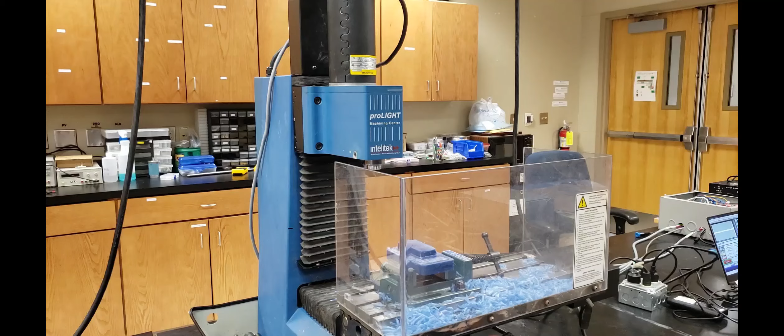This is a live demo of how to set your tool offsets and define the workpiece offsets. We will first demonstrate how to find the tool offsets for this machine.

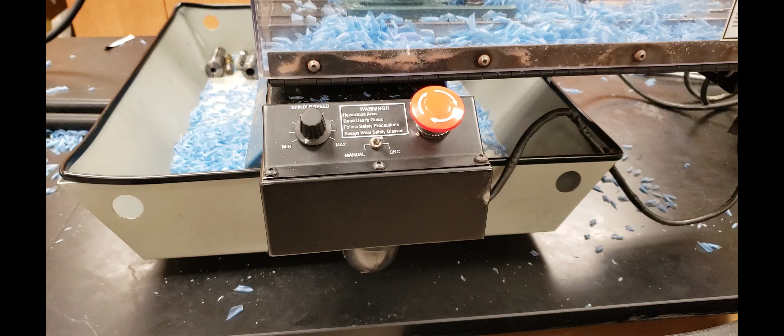Before we do anything in the machine, if we're going to be accessing this area in here, we must be sure that we hit the E-stop first.

Once the E-stop has been engaged, you can go ahead and lower the protective screen. Then using a pin, insert it into the slot here, and rotate the spindle until the pin locks in and prevents the turret from rotating.

Once you have that, you may then grab your reference tool, which will probably be the 9/16, and your Allen wrench, which is about 3/8, and insert it into the collet below.

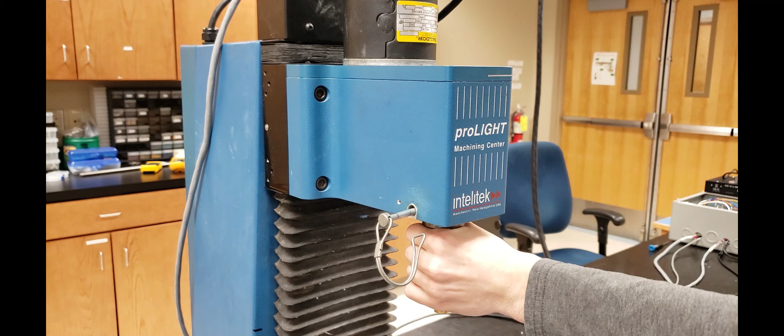If you're working by yourself, be sure you have one hand on the tool and slide it into the collet, but keep holding it with your hand, and with your free hand, go ahead and tighten the draw bolt on top, like so.

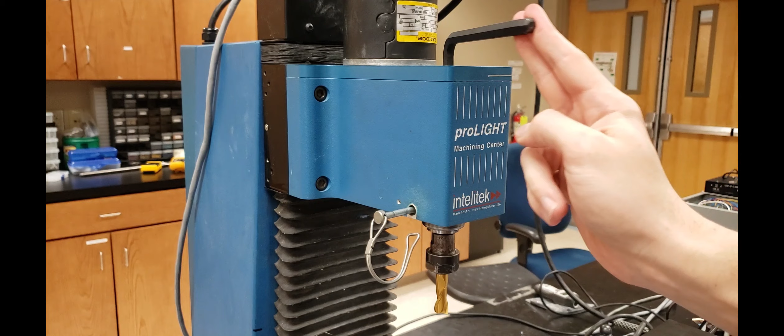For tightening, all you have to do is place the Allen wrench like so, and with two fingers on the end, just go ahead and push until it is tightened. That's all you need to do to tighten the tool in.

Once the tool is in, you may now remove the safety pin, bring up the blast shield, and disengage the E-stop.

Once we have the tool in the spindle, when you hit the E-stop and disengage it, you'll have to click on reset, since this is a digital emergency E-stop. Keep in mind you need to disengage that as well.

So once we have the tool in, we first want to go to our configure tool table and make sure this table is populated with all the tools that we'll be using.

For our reference tool, that will be our tool 1, which, like I said, will be the 9/16. We just want to make sure we enter the diameter, which is about 0.565 inches, or roughly that. The diameter of the tool may be different, so be sure you use a micrometer or another measuring tool to confirm what the diameter will be.

We'll also be finding the offsets for the 3/8 bit as well. Make sure you also enter the diameter. For this, for example, we'll just say the diameter for this tool is about 354 — again, this is just for example, not the actual diameter.

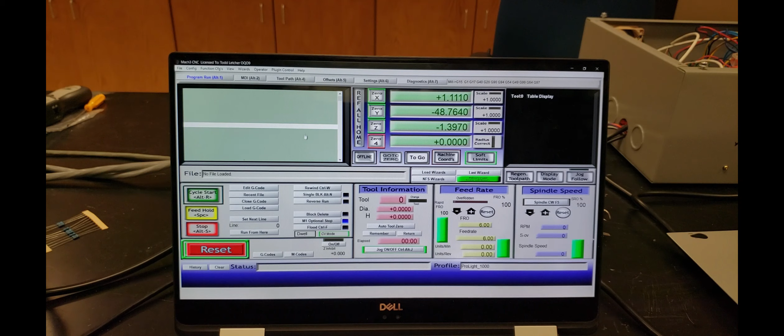When we find the tool offsets, we want the spindle motor to be off, so we don't need that running. Then we'll go ahead and go to our settings, our offsets.

In this window here, we want to click and make sure we enter tool 1. Then using our hot arrow keys, we're going to go ahead and move the tool above our place where we'll be finding the 0.

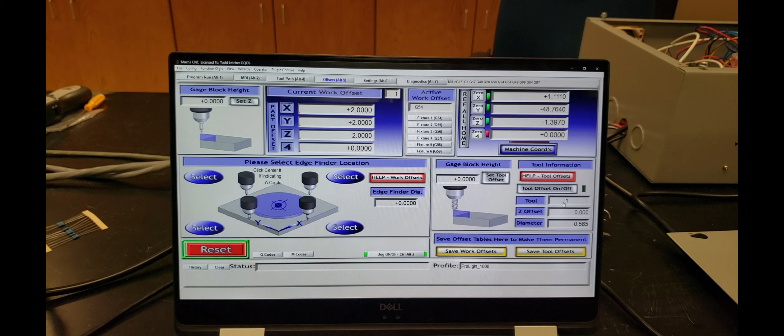In this case, we'll be using a wax block. We will now move the tool roughly above the block.

Before we go any further, you want to make sure that you're using a sheet of paper to help you determine when it touches off. So you'll just have this on top of the block.

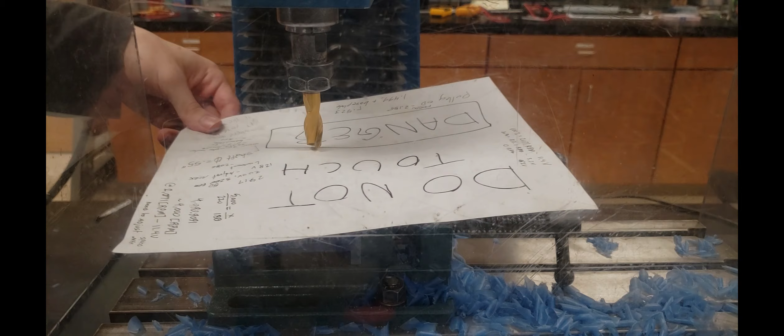If you have a partner, you'll ask him to move this back and forth, and once the tool makes contact with the paper and it stops shifting, that will be your 0 point. But if you're working by yourself, try to work best to your ability.

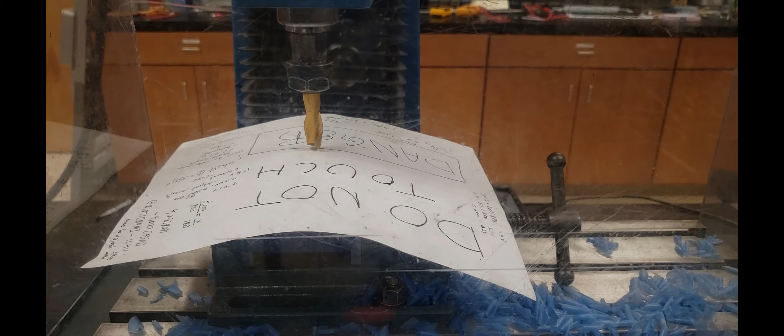In the software, there's just a few more things we need to take care of. Because we're using a sheet of paper to determine where our 0 point is, we need to tell the software how thick that sheet of paper is.

So first we want to go to gage block height, and then we want to enter the thickness of the paper. For this example, we'll say it's like 0.0032 inches. Then you'll hit enter, and it should propagate into this window. You want to enter the same value into this window as well.

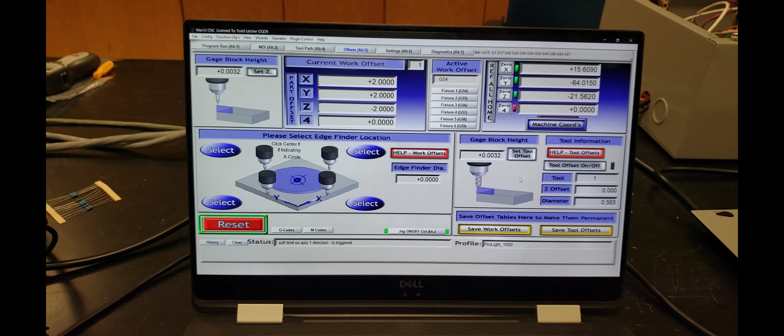The last thing to change is, because we want to touch the tool against the block, we want to make sure we don't go too deep. So hit the tab button and this window will pop up. Enter 10% for the jog rate and hit enter.

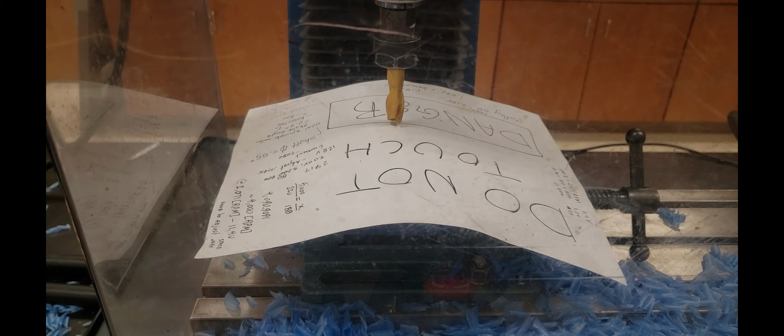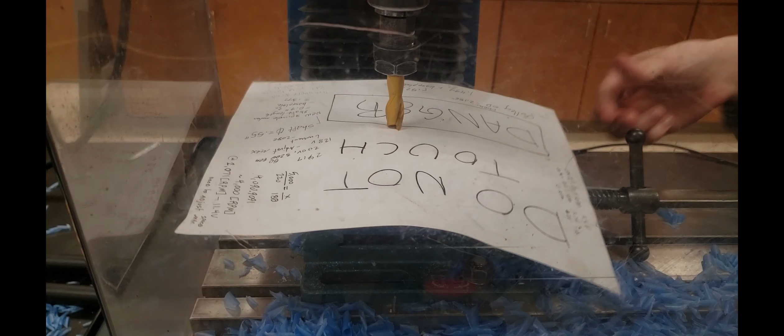Then click the tab button again, and that should slow down the rate of the axes. We will now touch off our reference tool to the top of the block. As you can see, the tool is touching, but the paper is still able to rotate, so we'll move it down a little further.

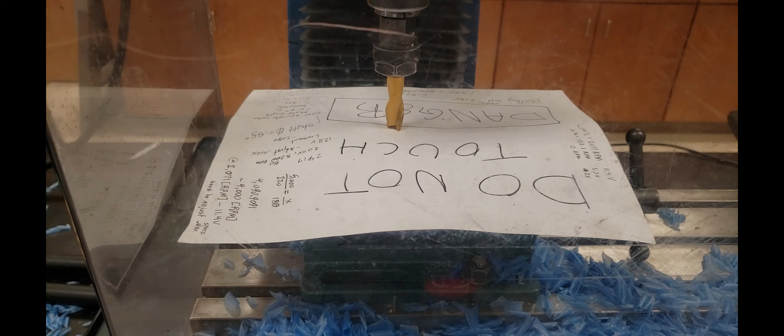Now the block is in contact with the tool, and the paper is no longer able to shift around. Now that we've touched down, we can go back to the software and implement the tool offset. Once the tool is touched, make sure to first click Set Z, and this will propagate the data over to here where our Z height is, then click Set Tool Offset. Notice this value here was positive, now it's become 0, and now the system knows this is our 0 point for our reference tool.

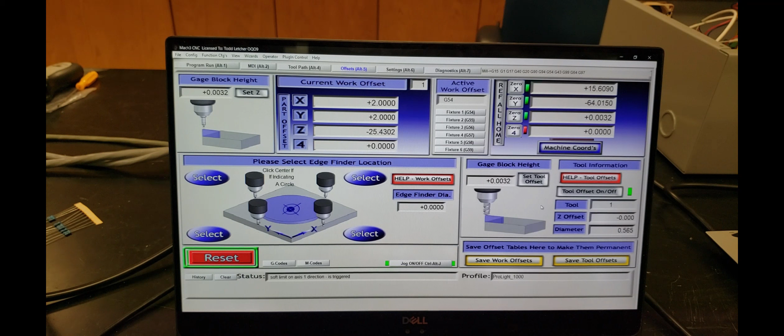Once we figure out our reference tool offset, we can go ahead and determine the other offsets for our remaining tools.

Once you have made your reference with your reference tool, go ahead and raise the spindle off the block just high enough so you have enough space to remove the tool and insert the next one. And once again, if you're going to be playing around in this area, make sure you hit the E-stop first before you open the blast shield.

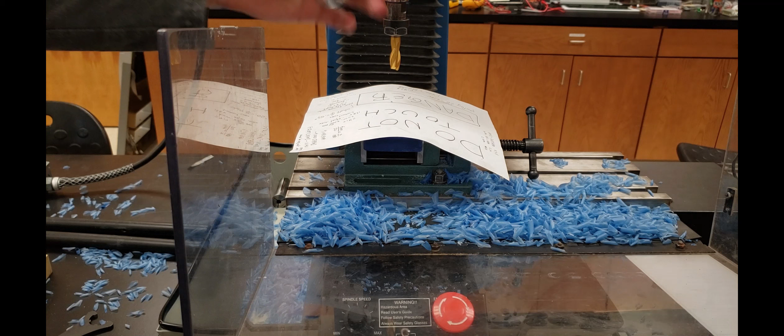And once again, in order to change the tool, make sure you insert the safety pin into the collet and make sure it's locked in place, preventing it from rotating.

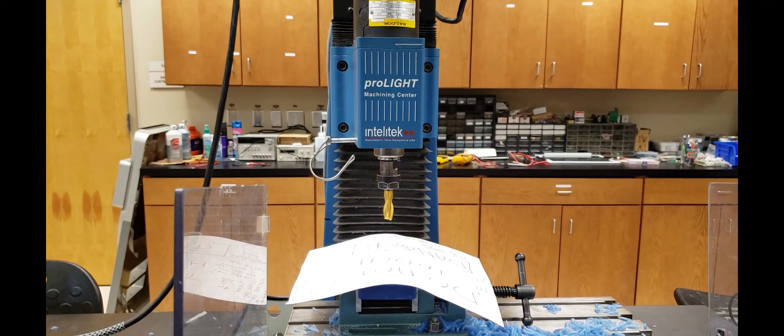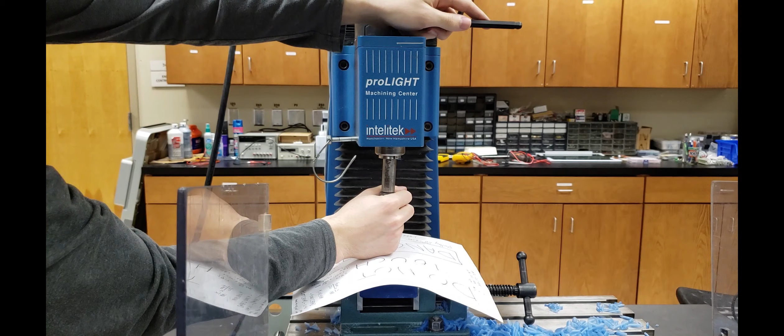Once again, one hand on the tool, the other hand, go ahead and loosen it. Just make sure when you're pulling it out that the tool does not fall off, so we can help prevent any further damage to the tools, as you just saw right there.

Once you have your reference tool out, go ahead and insert your next tool into the spindle. Once again, one hand on the tool and one hand tightens. If you are with a partner, work together to help each other get the tool secured into the spindle. Once it's secured, go ahead and remove the safety pin, close the blast shield, and disengage your E-stop.

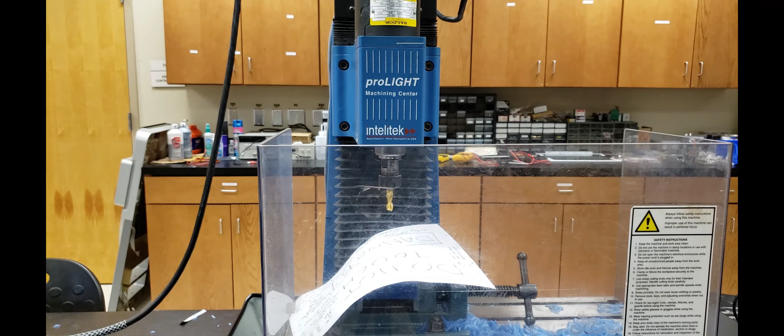Once the tool is in place, go ahead and lower the tool down until it's in contact with the wax block and the paper.

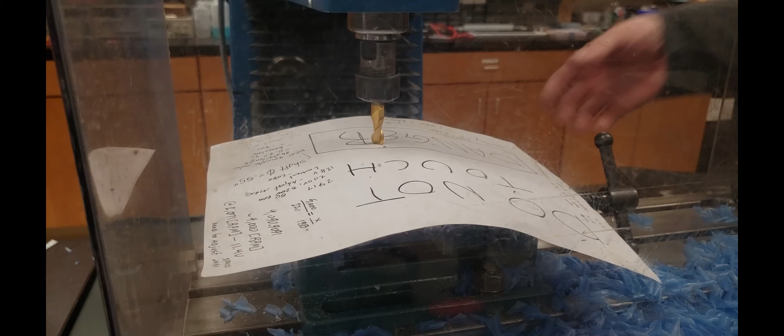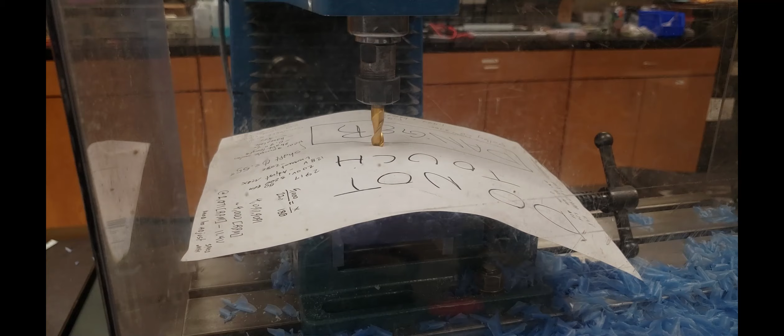Again, make sure to be moving the sheet of paper back and forth. As you can see, it's able to move around, so we need to lower the spindle a little closer to the block. It's still able to move, we'll move it a little further down. And now the tool is in contact.

Once the tool has made contact with the block, we want to go back to our software. In this window, we want to enter Tool 2, then just click Set Tool Offset. Notice it transferred whatever value was in this window here to our Z offset and replaced it with the height of the thickness of the sheet of paper.

And if we went back to Tool 1, it will show us that we are approximately this far down from where we designated our 0 point. Use this to make sure that your tool offsets are accurate and to double check that they're working.

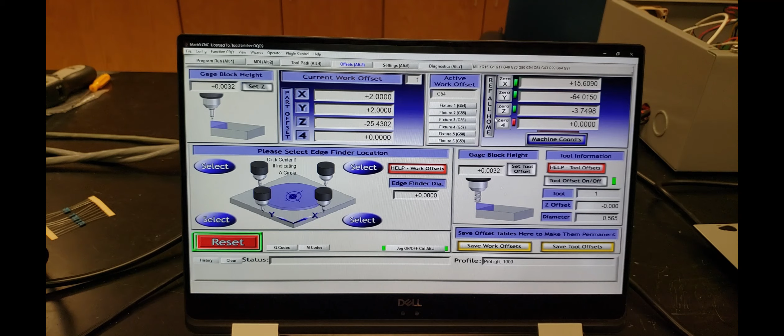Once you are finished, go ahead and click Reference All Home to move the spindle back to its home position once you have finished all your tool offsets. This is the same procedure you'll be using for all your tools.

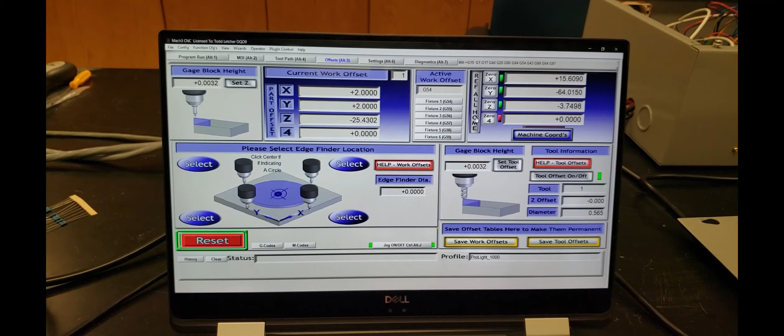Just be careful when you're doing your tool offsets that you don't damage the tool or the measuring device you are using. So once again, once you find all your references, go ahead and click Reference All Home, and it will move the spindle back to its home position.

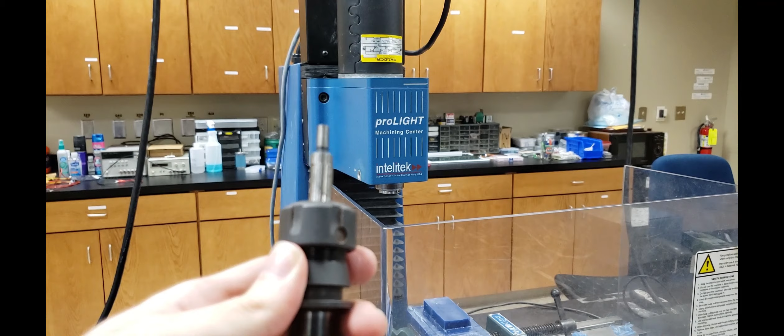Once the offsets have been determined for your tools, we can now go ahead and find your workpiece offsets. We're going to use an edge finding tool. Once you get close to the edge, the spindle will be rotating, and this will also be rotating. Once it makes contact, it will slightly shift to the side, indicating this is our touching point for this axis.

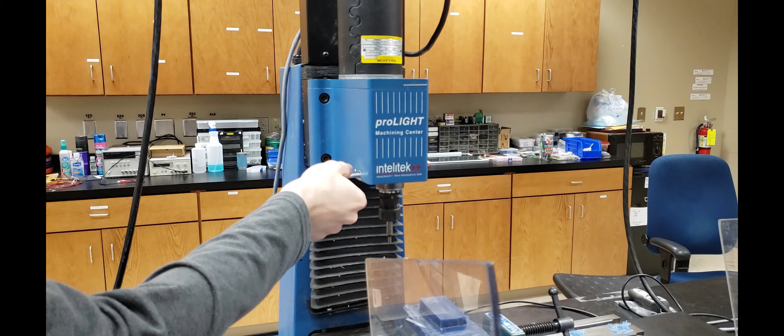Again, we're going ahead and inserting this into the spindle motor. Same procedure: engage the e-stop, lower the blast shield, insert safety pin into spindle. One hand inserts the tool, other hand tightens it into the spindle. Once it's secured, remove the safety pin, raise the blast shield, and disengage the e-stop.

Then we want to go to the software to determine our spindle rate. Because we are trying to find our workpiece offsets, we want to set our spindle speed for about 500 or 700 RPM. To engage the spindle motor, first we click in this window and tell it how fast to rotate. For our purpose, we'll say about 500 RPM.

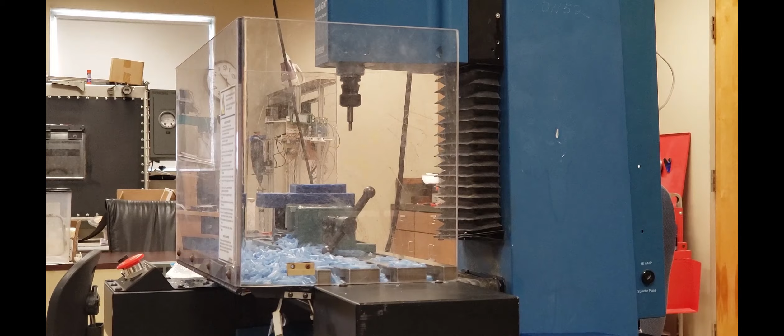Then we hit enter, and it should propagate up to this window with the same value. Then we click on the spindle button, and this will engage the spindle motor. Once you click it, there should be a 1 to 2 second delay, and the spindle motor should engage. As you can see, it is starting to rotate at approximately 500 RPM.

Once the spindle motor is running, we want to go to our settings tab—my apologies, the offsets tab. This is probably a good idea to do before you start the spindle motor. Go ahead and measure the diameter of the edge finder and enter it into this window. For our purpose, we'll say it's about 0.05 inches in diameter. Make sure that we have tool 0 entered in this window here.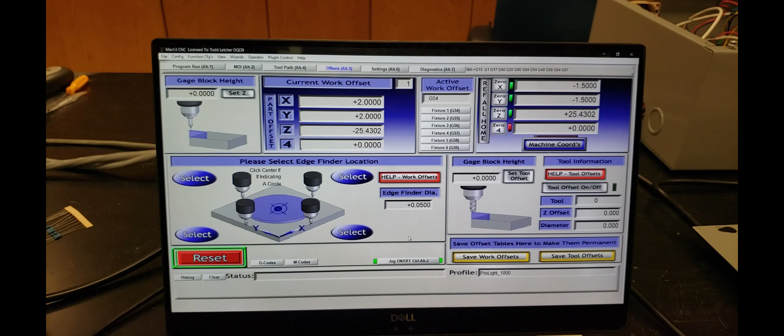Once that is set up, use your hot arrow keys to adjust the spindle motor until you can find the edge of your axes. We'll go ahead and first find the zero point for the x-axis, so we'll move the spindle motor to approximately where that will be.

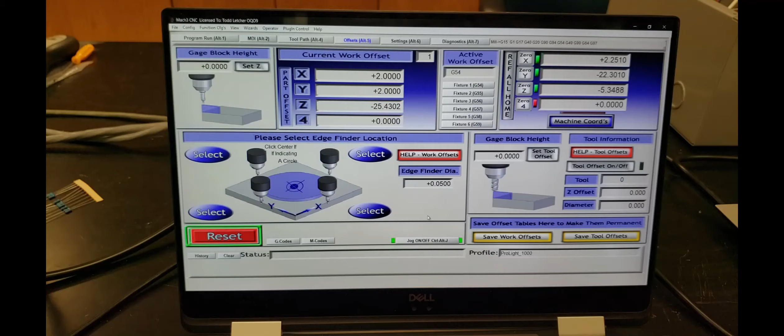Again, once we get close to the edge, we want to hit the tab button and adjust our jog rate to 10%. Hit the tab button again to remove the window, and then we'll go ahead and find our zero point for the x-axis.

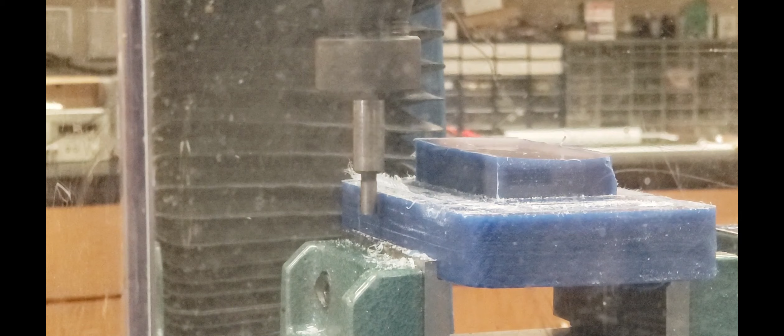As you see, the spindle has shifted, indicating that we have touched our zero point for the x-axis, and then in the software we can determine how to enter that in for our data.

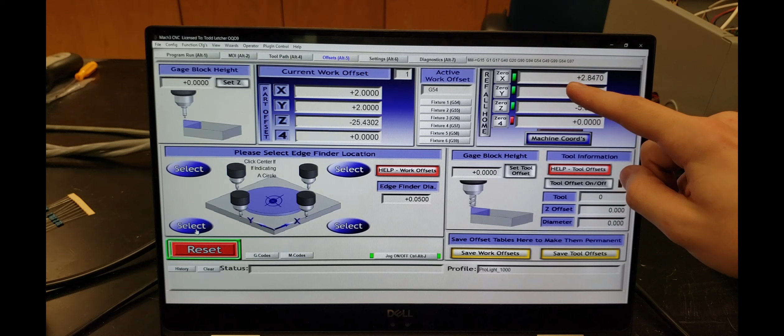Once the edge finding tool has touched the edge—again this is for the x-axis—we want to click this select button. Once we click this, the software will take the diameter of the tool and do a little calculation to make the adjustments when we enter the data. So when we enter the data, it takes into account the diameter of our edge finding tool and subtracts that from our actual value for our zero.

So if we click select, we will notice that it entered the value into our X window here and has entered the radius of the diameter that we entered. We will use the same procedure again to determine the zero point for our Y axis. Once we're done with that, we can go ahead and click reference all home, and then we can switch out the edge finding tool for our tool 1, our reference tool.

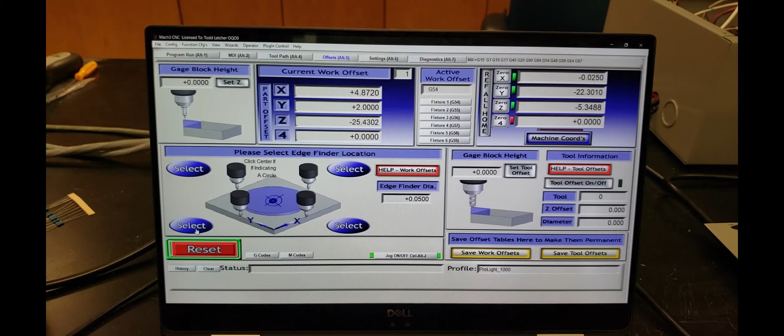Once you have found the 0 points for your X and Y axis, home the machine. Just make sure you turn off the spindle motor before you home it. You'll have to go back to the program run and turn off the spindle motor before you click reference all home.

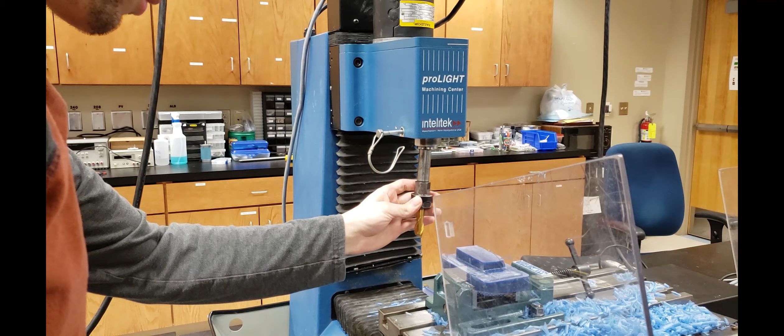Once the tool has been homed, go ahead and hit the e-stop and replace the edge finding tool with your tool 1 or your reference tool. Again, insert the safety pin, rotate the spindle until it locks into place. One hand on the tool, one hand loosens it. Then go ahead and insert your tool 1 or your reference tool. Again, one hand holds, one hand tightens. Remove the safety pin, close the blast shield, and disengage the E-stop.

Now for this one, you won't have to turn on the spindle motor. You just have to move the tool above the block, and again use the same method to find where it touches. Just place a sheet of paper on top, and if you have a partner, have them move it back and forth. If you're working by yourself, then do the best you can.

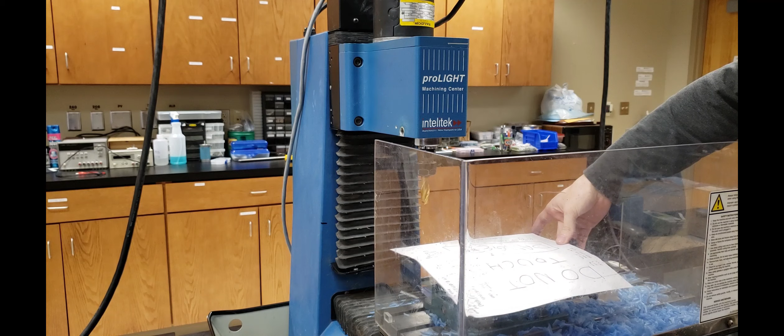Once again, to find our zero point for our workpiece, we want the sheet moving back and forth until it tells us that it is touching the block. So again, make sure that before you go any further, you hit the tab button and enter 10% jog speed, then hit the tab button again to get rid of the window, and use your hotkeys to determine your Z point.

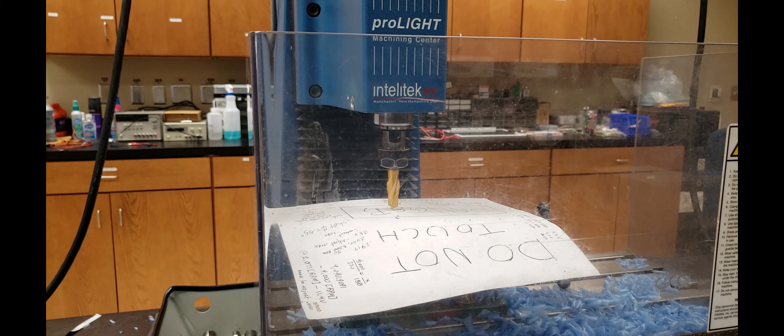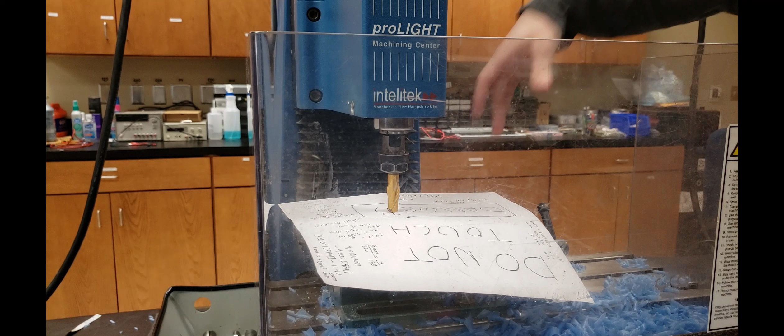As for setting your Z, again we want to enter the thickness of the paper we're using. For example, we'll say it's 0.0032 inches, and we want to hit enter. Then we want to make sure that this window here is showing tool 1. Hit enter, and once we have that, go ahead and click set Z. Then it will transfer the value over to this window, and now we have found the workpiece offsets.

Last thing we need to do is then reference all home. There is a reason why we're doing this: this window here called current work offsets should show the opposite values of what we get in these windows here. So this is a good way to verify if the tool offsets and the workpiece offsets have been entered correctly.

So if we look here, we have negative 4.372, and in this window here we have positive 4.8720. The reason why it's not exactly the same is because we were taking into account the diameter of our tool, and that will explain why it's a little bit off.

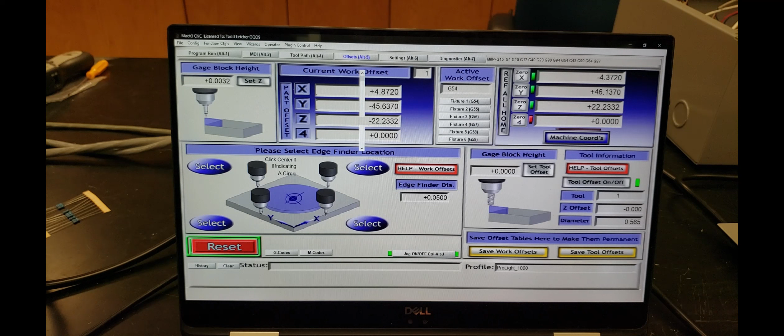Last thing you want to do is go back to program run, click load G code, find the G code that you want to run, and click open. Then the G code should load into this window here, and you should get a tool path generation right here as well. Then feel free to click cycle start, and it should run.